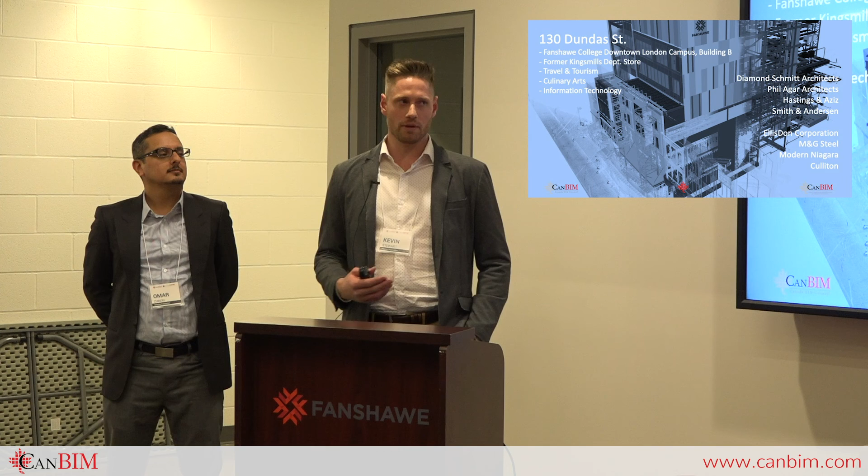We have a heavily serviced building. I've heard the equivalent of about 80 different restaurants in terms of the amount of equipment in this building. And obviously that equipment needs to be serviced: gas lines, exhaust piping, exhaust ductwork, I should say. And that is really one of the main uses of BIM that we were able to take advantage of on this building for coordination purposes.

Just to talk a little bit more about the building, you're only able to see a small portion of it. I know Steve was running through some of the salvaged items earlier. Right above us, all these joists that are the ceiling feature, those are all structure from the 4th floor that were taken out carefully, refurbished and brought back in as a feature. So that's one more thing we've got in this building from the old department store.

So running through again, we've got cooking labs and prep kitchens here. Most of that is where we have some heavy services, and we've got some great fly-throughs of the model that are going to show that. Classrooms and computer labs all throughout for the IT programs and for general learning. The demonstration theater as well, a cooking show type of setup upstairs on level 2. The chef's table, restaurant and deli, school store, amphitheater, which we're sitting in now. Golf simulator room down the corner, which we have yet to try out ourselves, unfortunately.

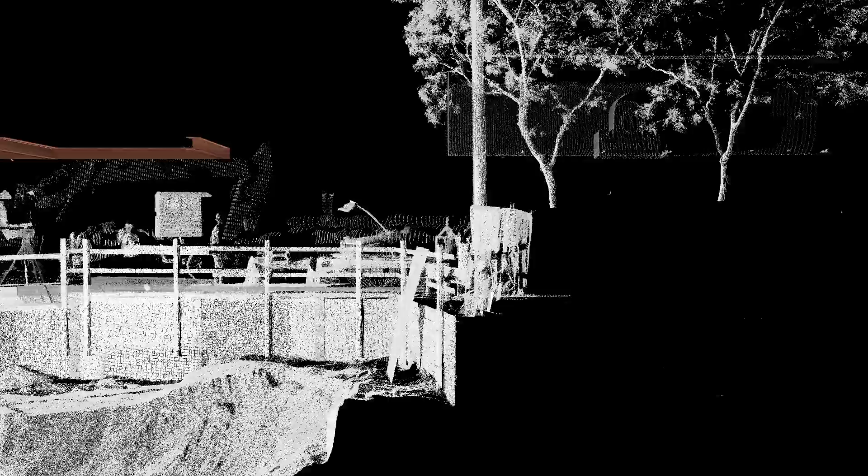So I mentioned the shoring phase here. This is a photo looking north with the building more than half down for sure. These are some of the shoring posts that were put in to hold up the neighboring properties. And we were able to, again, use this 3D scan to compare that to the steel model there.

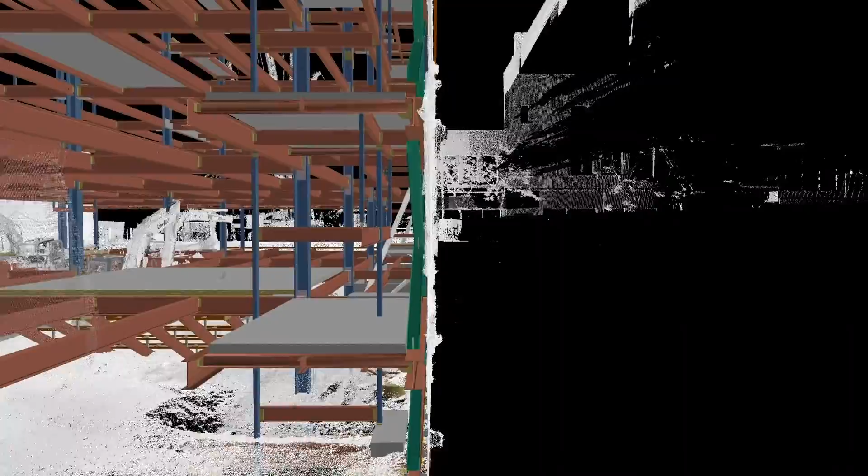So in this video, we're actually looking south and we're traveling backwards along this very wall right here. You can see in gray, that's the point cloud. And then obviously the colorful stuff is the steel model. Every now and then you'll see shoring appear, and you can see how it interacts with the future steel.

And this is obviously the heritage facade out front and how that interacted with the future steel as well. So there's some final checks there as well, tying into that with a new structure. We were able to take the 3D scan and give it to the steel contractors for some last minute dimensional checks with the existing conditions.

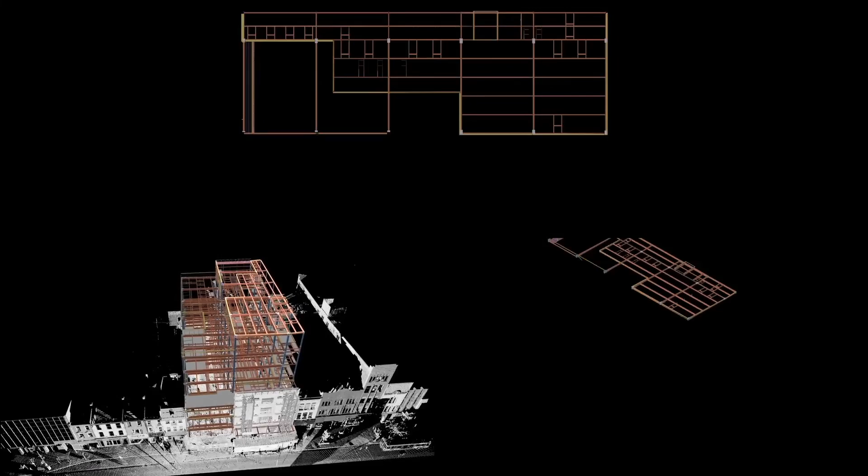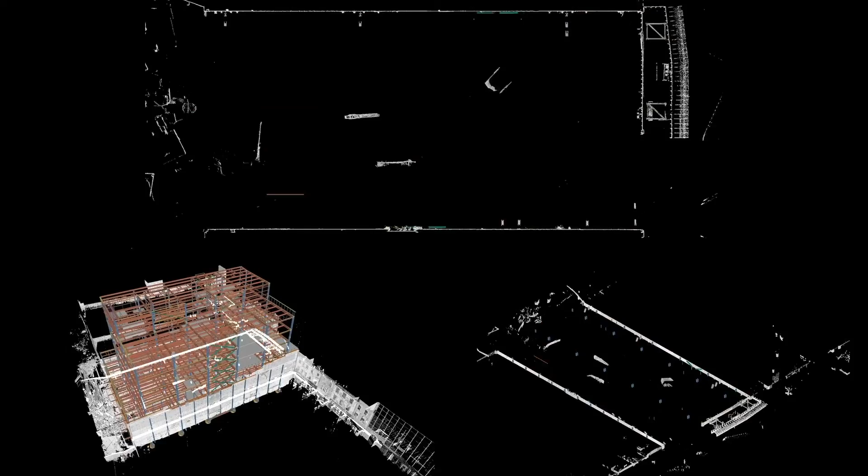This here is more of the point cloud versus the steel. When you see the rotation on the left-hand side, every time it hits a floor, it goes a little bit white. That's what level it's at. And those other two views are different views of the point cloud section as it goes through, kind of like a CAT scan. So this is going from top to bottom, and then we're going to switch and go from south to north.

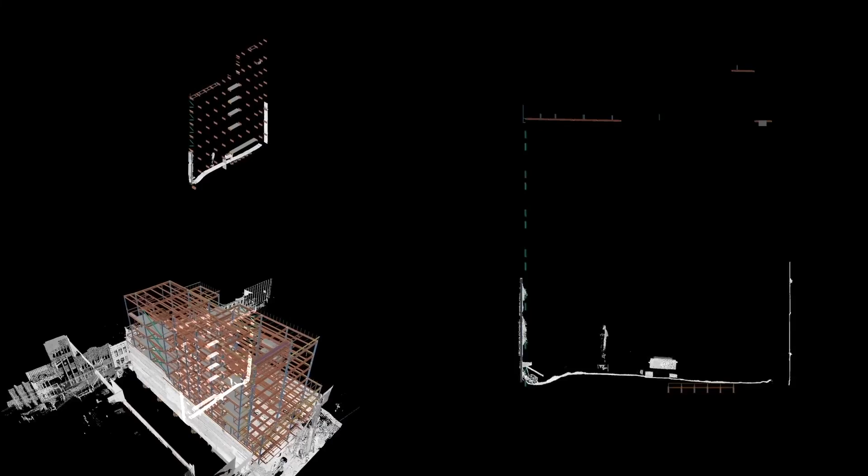And you can see we did the scan without even interrupting construction. You'll see some of the outlines of excavators, and we had a caisson drill rig here as well the day we did the scan. So everything was moving along tickety-boo while this was all going on. So luckily, all our scanning personnel survived.

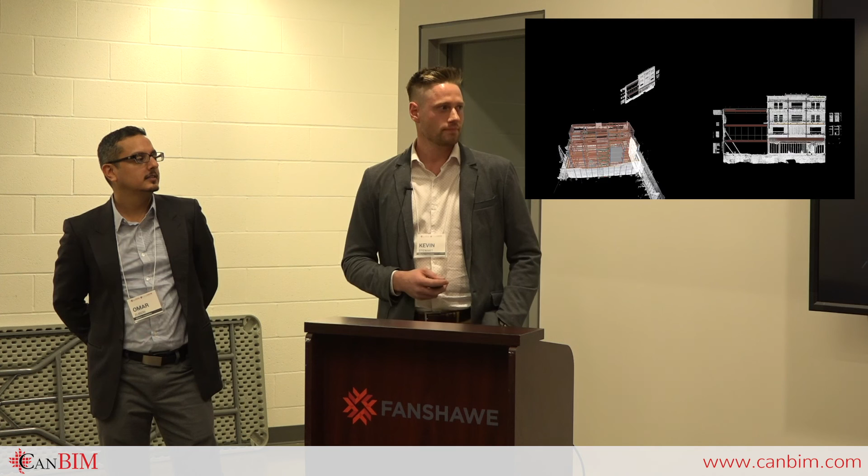Okay, so just a couple quick snapshots of examples of how we used it. There weren't a lot of issues to check on, but the challenge was coming to the site and having to find a plan B to erect the steel if one of the main members happened to interfere. Again, we were confident that wasn't going to be the case because we did take some time to lay it out, albeit more by hand than through a modeling program, but this was our final check on that.

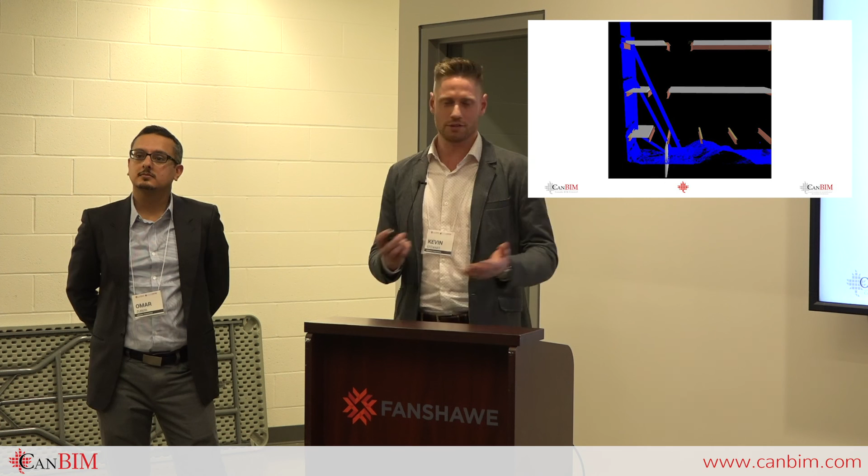So just a couple examples of what we'll call close calls. I think there was one scenario over on this side of the building where we were within an inch of the existing shoring with the new steel, but everything worked out just fine. This is on the southwest end of the building, just in the restaurant there. So just another example of where we had to plan out the locations of all these shoring posts around the existing steel.

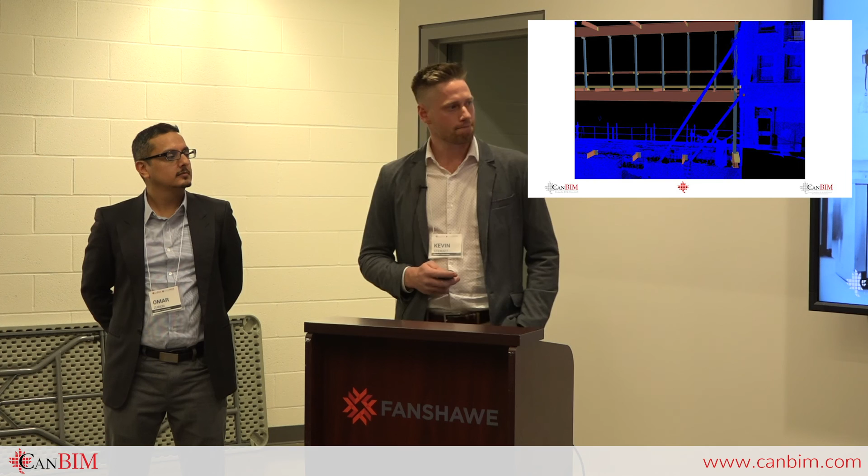So that's a little bit about the structural aspect here. Omar is going to talk a little bit more about the model and how it was used for the M&E services and clash detection, that kind of thing. So Kevin, how many restaurants did you say? 80. The equivalent of 80 restaurants in one building.

So it just boggles the mind, from my experience, the amount of mechanical, electrical, and plumbing that is needed to support that much. You've got the fume hoods, you've got the drain points, you've got obviously the gas lines and everything else, fire sprinkler systems. So all of that, equivalent for 80 separate restaurants, needs to be shoved into one building. So that's just to prepare you for what had to be dealt with when it came to coordination.

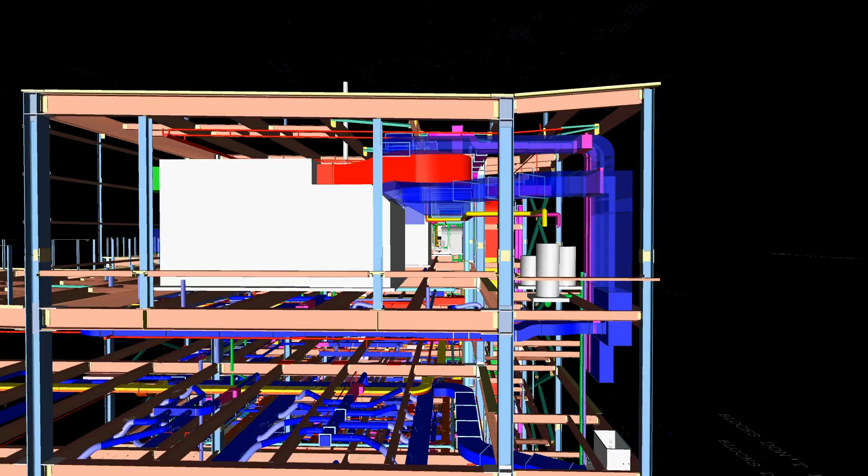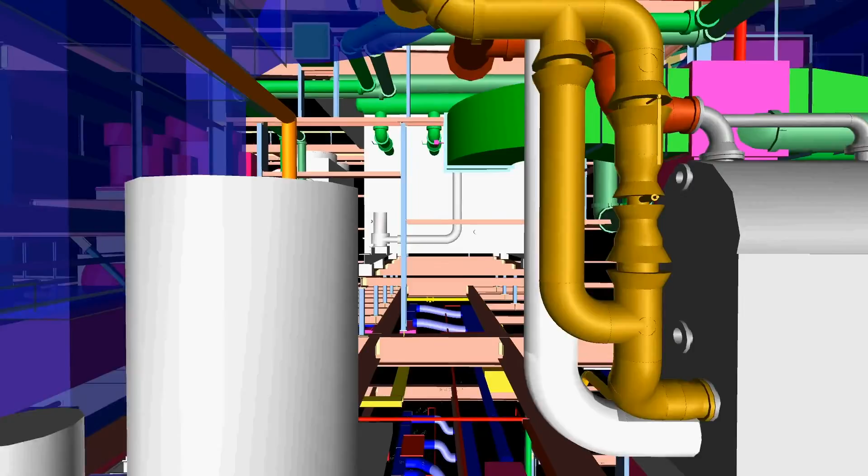This is actually the mechanical penthouse. You can see, and this is the trades model, right? Yep. Who was the trade? Modern Niagara. And obviously they had to do a lot of coordination. Generally when we start 3D modeling and coordination, we want to follow the construction schedule, which means bottom up. We tend not to build a building from the top down. It's kind of difficult with gravity and everything.

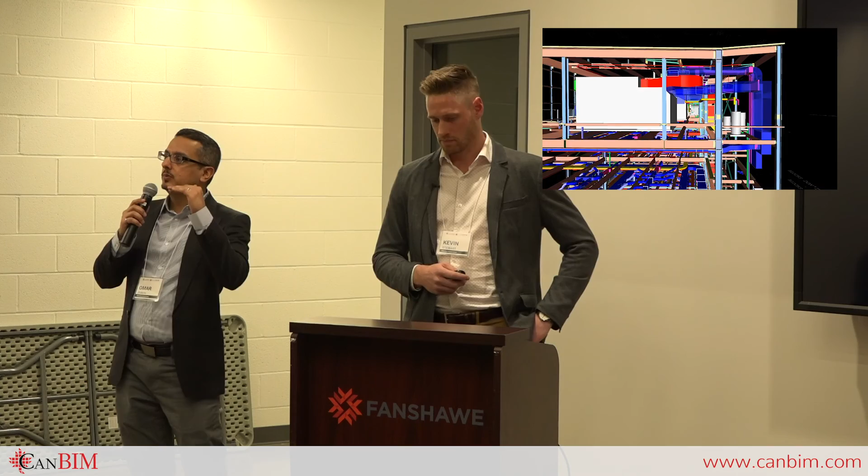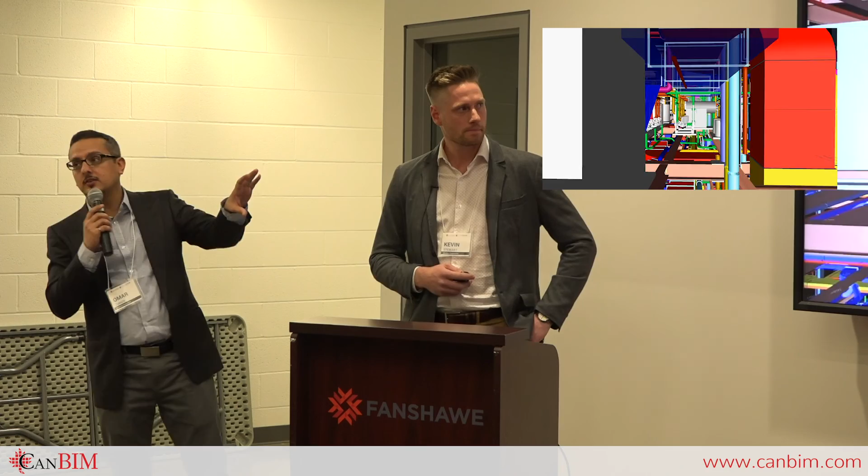But that being said, you obviously want to also take into account the complexities involved, i.e. once you get to the mechanical penthouse, it's one of the most complex mechanical setups in the building, so you want to give that a bit of a head start. When you're going up the building, let's say each floor will take 4 weeks, but the mechanical penthouse will take 8. So as soon as possible, you want to do a pincer attack and do multiple floors in order to be ready when it's time to install the sleeving or start prefabrication of mechanical, electrical, and plumbing materials.

So really what that was used for was being able to take this model well before the steel was even up, and all of the larger size piping you see in there that connects the major pieces of equipment was spooled up and built in their shop. So they came out with a few truckloads worth of mechanical piping, brought it up just before we closed up the roof, dropped it into the penthouse, and from there it was just putting it together like Lego. So it saves a lot of time on schedule, saves a lot of time on, oh shoot, this doesn't fit the way we thought in the mechanical room. It was a very packed space. I wish we could tour through there after, but I don't know if they're gonna let us. But that was a great use of the technology for sure.

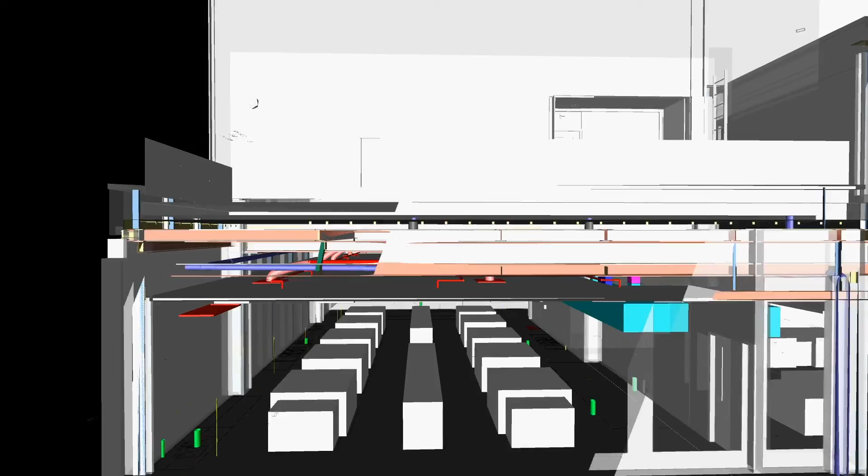Here we're going through the building. These are the 3rd and 4th floors. Kevin and I specifically picked this to go from the back to the front of the building in order to show you what's happening in between these floors. So Kevin, what's on the 3rd floor? The 3rd floor is mainly the cooking lab. We're going through one of the savory labs right now with a central hood. This is both the exhaust and the return air, makeup air here.

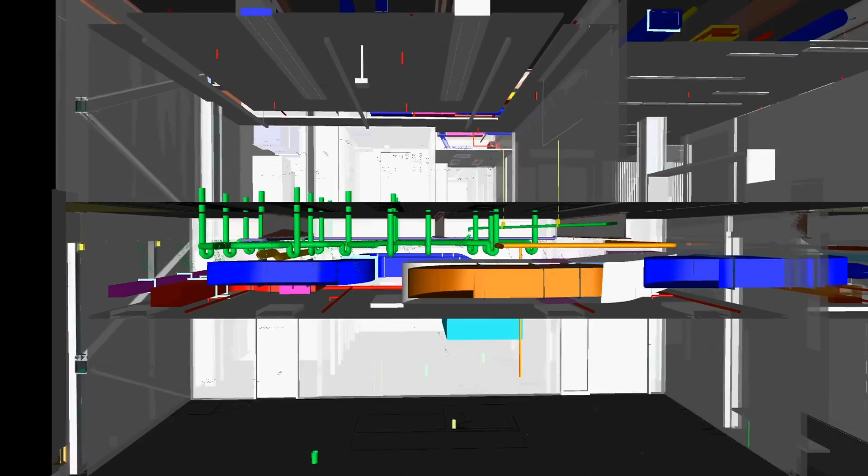These are obviously drain points for the mixology room above. That's right, yeah. And now we're into one of the last savory labs on the north end of the building, and this is more of an island-based setup for the cooking station, so it has a lot more distribution in that room for sure. There's 2 of those. You can see the density of the ductwork there.

Additionally, before the ductwork goes up, you look up and say, oh yeah, there's plenty of space. But you have to remember that ductwork tends to go straight, and it tends to want to go past the steel. And the steel takes up half the space. So while you may see 2 feet of space, you've actually only got 1. Because if the ductwork goes up and down, that builds in resistance to the airflow, which in turn requires a bigger air handling unit, which means you need to upgrade the structure in order to handle the weight, and it just ends up cycling and snowballing from there.

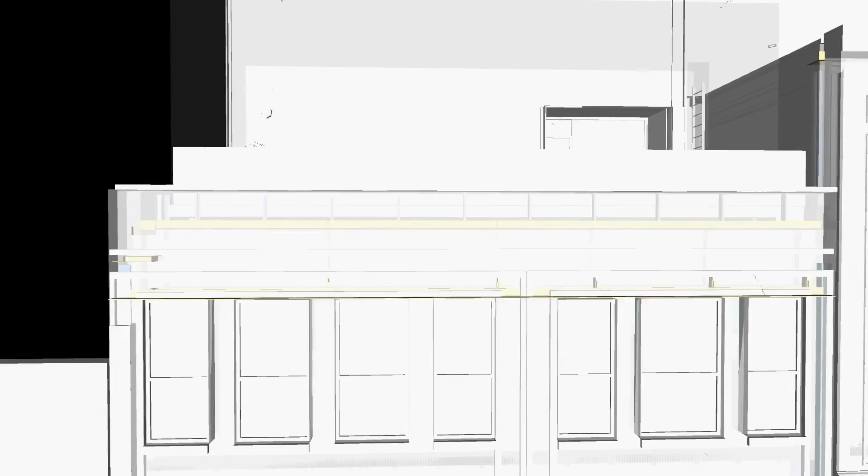Yeah, so one last fly through. We like the last classroom that we got into here just because it's such a maze of ductwork mainly, but there's some piping in there as well that was all coordinated with it. So just a great taste of what we don't see below the ceiling, obviously.

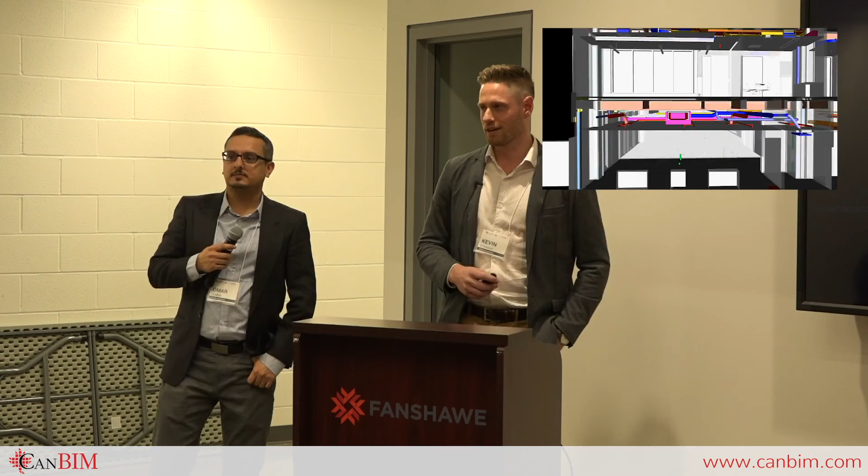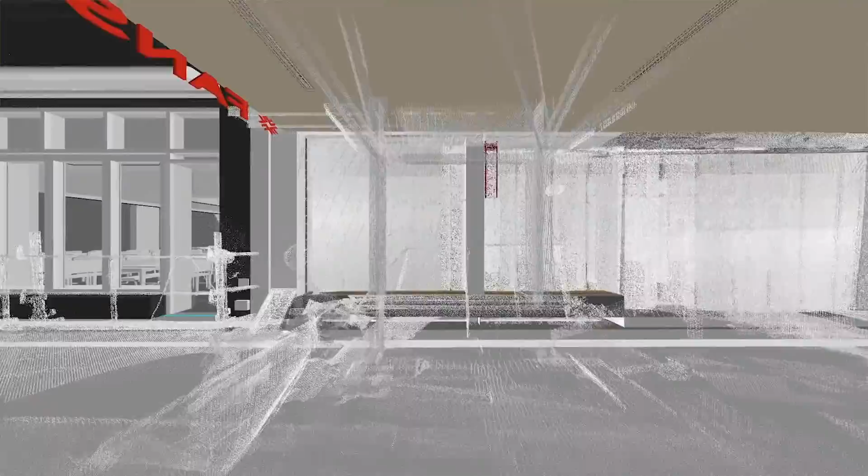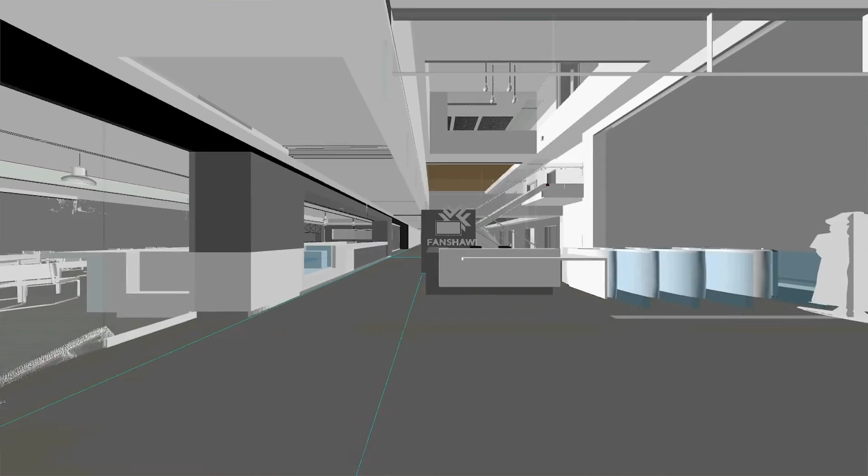So on the left-hand side, you've got a little bit of the top of a machine. Here you're entering through the turnstiles.

Show of hands, how often do they work or not work? Don't ask. There we go.

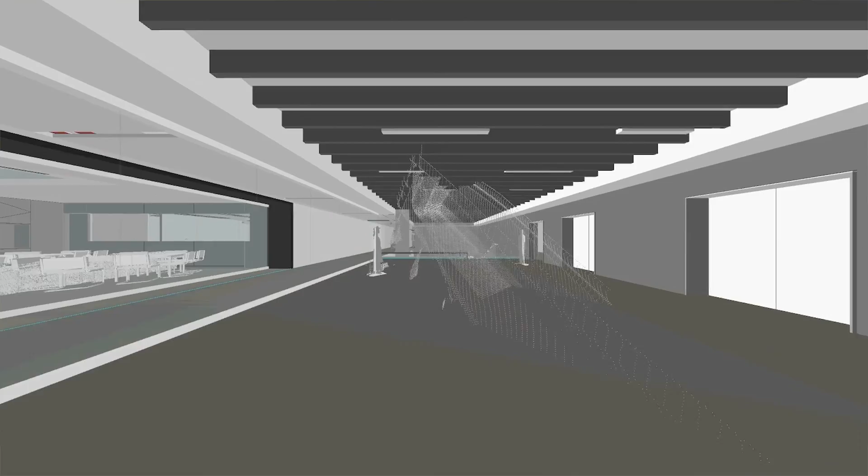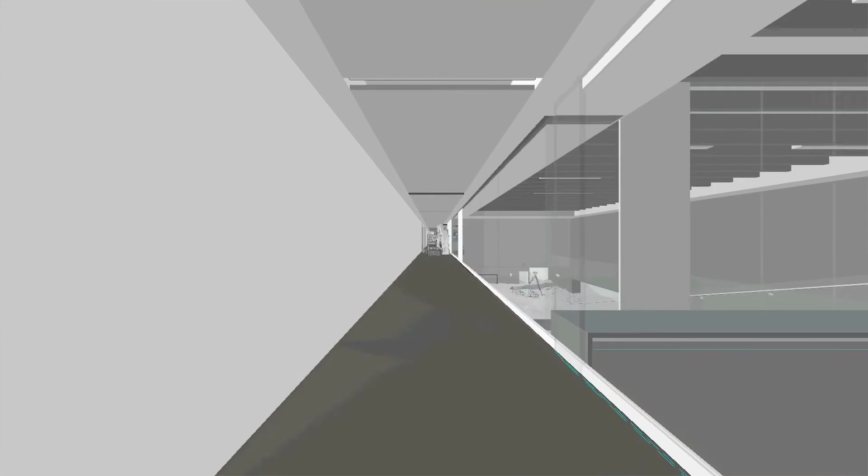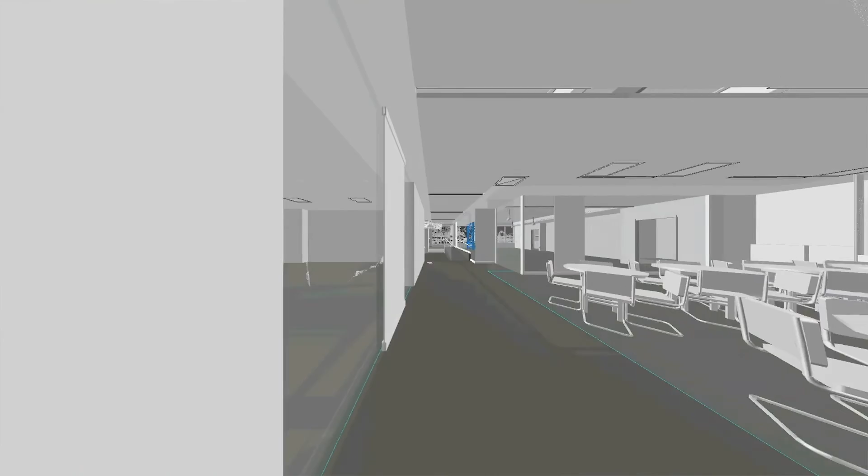And here we're walking over the top of a digger. I call it a digger. What is it? It's a digger? That's what my kid calls it. It's an excavator. Sure, an excavator. Yeah. There we go. The technical term. Yeah. Clearly, I've been reading too many "If I Was a Digger" books to my 4-year-old.

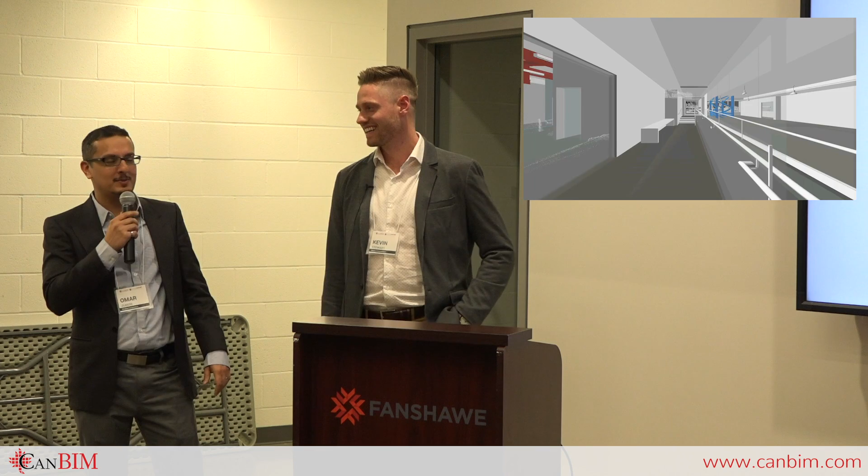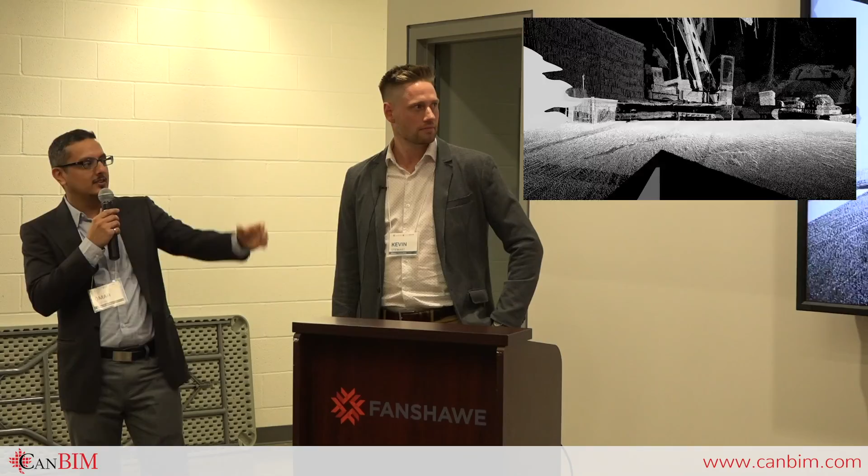And of course, there was this lovely blue crane base where the crane was while the building was being constructed. It's another thing that tends to be overlooked when you think about BIM, the temporary equipment. And here you've got different angles depending on when the scan was taken of the caisson. Was it caisson? Yeah, a drill rig. Drill rig. But back to my point, you don't really think about all the temporary structures such as a crane base.

So we don't have an image of the whole model. We decided to omit it from the presentation, but there was a nice big yellow concrete block underneath the building, which is the actual block for the crane base. And we had to figure out where to put that block, how to pour that block, and then backfill over that block, as well as, if the crane is there while we're building the building, what does it impact? What are we going to have to delay with regards to installation until after the crane has been taken out of the way? Lots of fun logistics stuff like that.